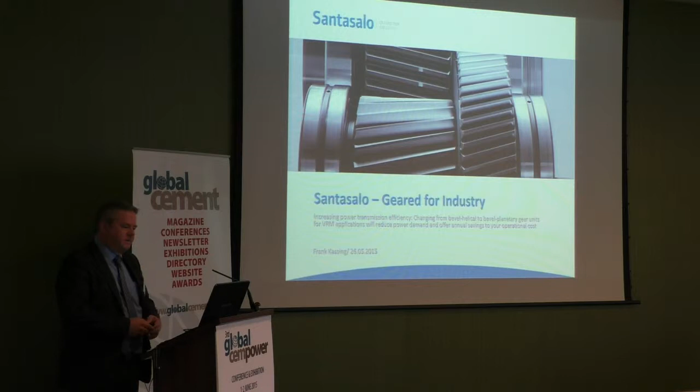So I will give you a short information about the possibilities to use different gear types, in special for the vertical roller mills. I will start. So where we come from and where we are, because more or less that is something nobody knows. The name Santasalo is quite new on the market, but we come later to this point.

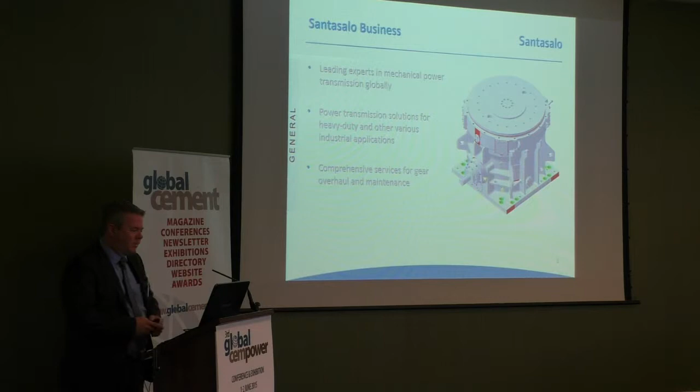We are a leading expert in mechanical power and transmission globally, so we are a worldwide company. We are very keen in the power transmission for heavy duty and other applications. And we also offer complete service for gears, overhaul and maintenance for the complete package.

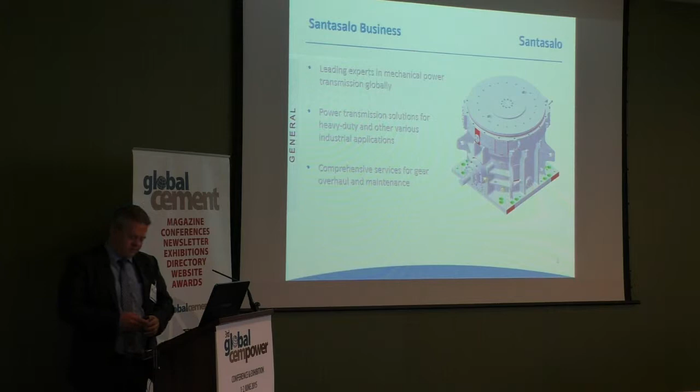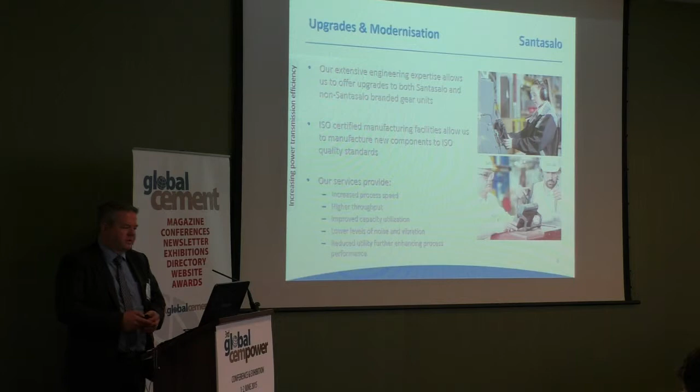And with our service, we can provide increased process speed, higher throughput, improved capacity utilization, lower levels of noise and vibration, and reduced utility, further enhancing processes.

In general, coming to the point vertical roller mill, we can offer a wide range of vertical roller mill gearboxes. We have, at the moment, more than 100 units running for coal grinding, more or less. We have also some gearboxes running for clinker and also cement.

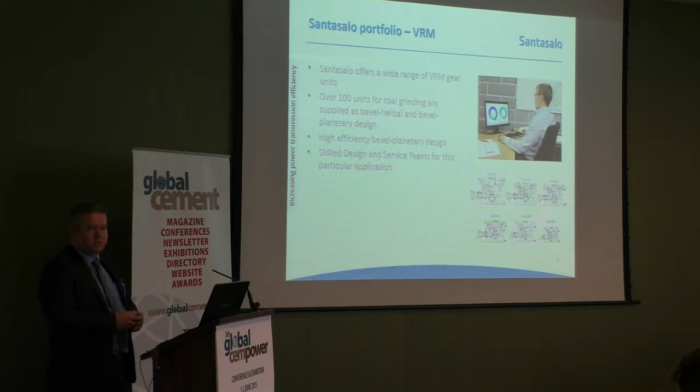We have developed a wide range of high-efficient bevel-planetary gearboxes, and our service and design team for this application is very special. You can see a small overview about the different gearboxes we have in our portfolio. So more or less for all coal mill applications we can offer something, maybe also for some cement applications.

Increasing efficiency, it's a wide range, and in this case we want to show you a little bit what is possible with the newest technology. Older VRM units often used bevel-helical gear units, more or less in coal milling. It's very popular because of this cheap design. The efficiency of these bevel-helical units is poor against the newest design of bevel-planetary gearboxes.

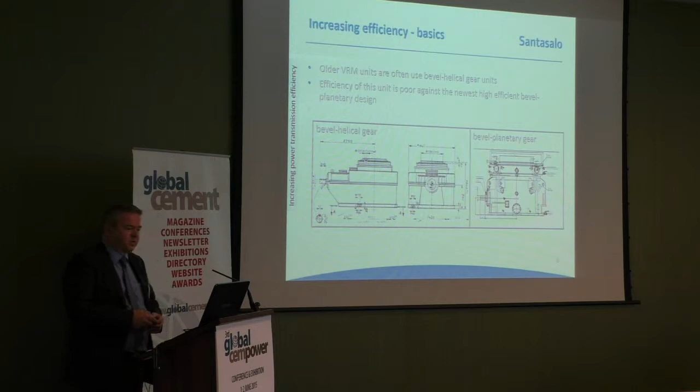The difference you can see here: this is one bevel-helical gear, old-fashioned design, and the bevel-planetary, which has the newest high technology inside. To make the calculation about this gearbox and the losses and where they come from, we have a bevel-helical unit, we have a bevel stage with losses inside of the gear unit around 1.5%. We have 3 helical stages, which means losses of around 3%. That means the total loss in the gearbox is 4.5% only for the gears and bearings.

The cooling power demand of a bevel-helical gearbox is around 22.5 kW, and that means, to make this calculation round, power demand of the motor at 80% load means 400 kW, which we set as a base.

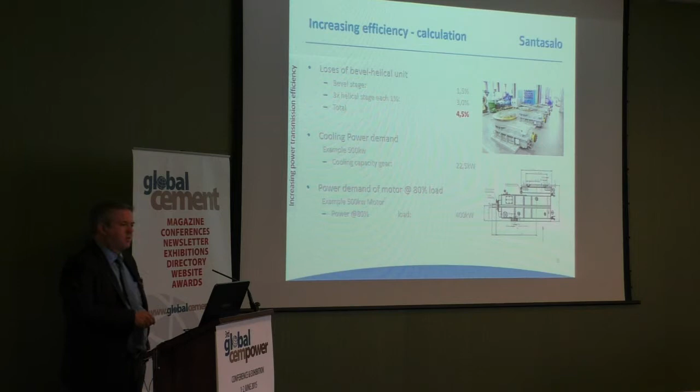If you look at the newest planetary design, we have the same bevel stage with the same losses, that's 1.5%, but we have only one planetary stage inside. That means only 1% losses in the planetary stage. That means the total losses in the planetary gearbox are only 2.5% against 4.5% for the bevel-helical gearbox.

The cooling power demand also will be reduced down to 12.5 kW. So that means the power demand of the motor at the same power output at 80% load of the vertical roller mill gearbox is only 392 kW.

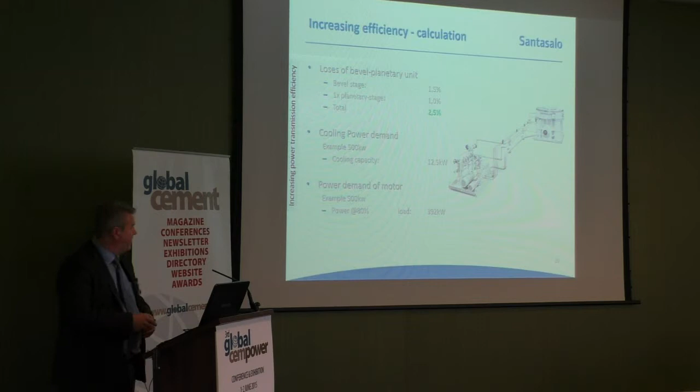Putting these numbers together, you see the losses of a bevel-planetary gearbox are around 2.5%. The losses of a bevel-helical unit are 4.5%. Calculated down, the reduced power demand of a bevel-planetary gearbox is 8 kW, which we have reduced by changing the gearbox design. The cooling capacity we have reduced to 10 kW. That means the total efficiency of the gearbox is much better than a bevel-helical gearbox.

What does it mean in savings? We only calculate the power demand for 8 kW. That means savings per day, if I use this new design, are around 190 kW. Per month, I have 5,760 kW. Per year, I can save with the right and newest design around 69,000 kW. If I calculate with 5 cents, it's not too much, but in total, this kind of savings, which comes directly off the gearbox, will help you also to reduce your cost in the plant a little bit.

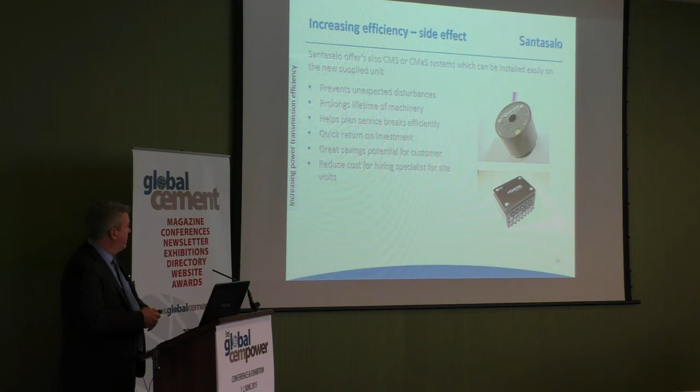This system will help you to reduce the cost as much as possible. What makes this CMaS system different from most systems on the market is that we are also checking the oil quality during the process. The CMaS system continually monitors the gear unit in real time. That means in our head office we can see at any time what is going on with the gearbox, and we are also counting particles, which are sent to our system every 15 minutes.

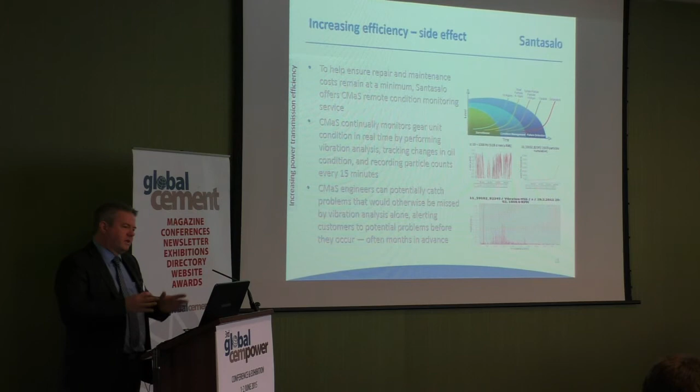And our CMaS engineers can catch the problems at the right stage, so we can see a problem inside the gearbox a lot earlier than you can see it at site by only checking the vibration of the gearbox.

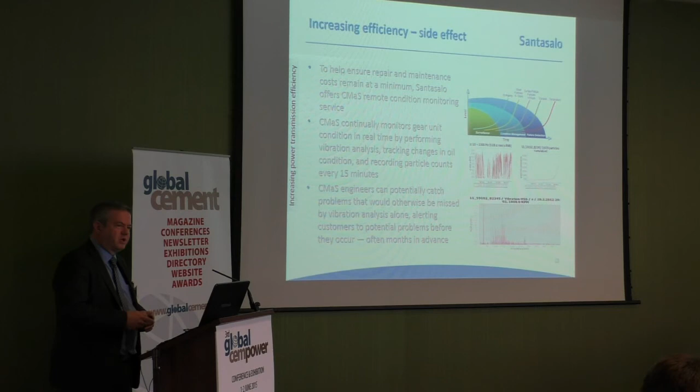Santasalo, to give you a small summary. We are a solution provider, not only a gearbox manufacturer. Our brand is well known on the market. We have changed names a lot, but now Santasalo is the name we are going forward with. Our manufacturing and service capabilities deliver world-class quality products, and we are flexible and innovative in this business, so we also offer special gearboxes for your special demands.

We build partnerships with our customers, so we don't want to be only the one you buy a gearbox from. We want a long-term partnership, and we try to be number one in the choice of your gearbox supplier in the future.

That's all. A very short presentation, so more time for questions. Okay.